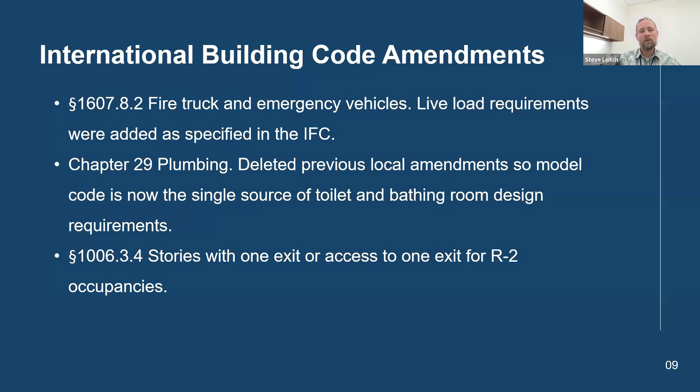All right, the residential code. Similar intent and purposes as the building code. The residential code, however, only applies to single family, 2-family, and townhouses, although we do have a policy memo that allows certain triplex structures to also be reviewed under the IRC.

We've added a definition of surcharge to be consistent with the IPMC, really just to help us understand when retaining walls require permits. The definition of a surcharge talks about there needing to be additional load placed on the retaining wall in addition to simply the earth that it's retaining.

In chapter 3, section 318, we've amended the requirements for egress doors such that in residential construction we will allow either side hinged or pivoted or balanced doors now. The way the code was written, it only allowed side hinge doors, so we've expanded that allowance.

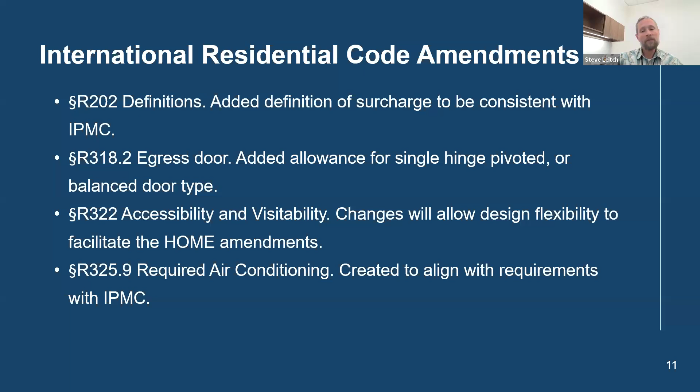All right, the plumbing code. Unlike the residential and building codes, which are written by the International Code Council, the plumbing code and the mechanical code that we use here in the city are the uniform codes written by IAPMO, the International Association of Plumbing and Mechanical Officials.

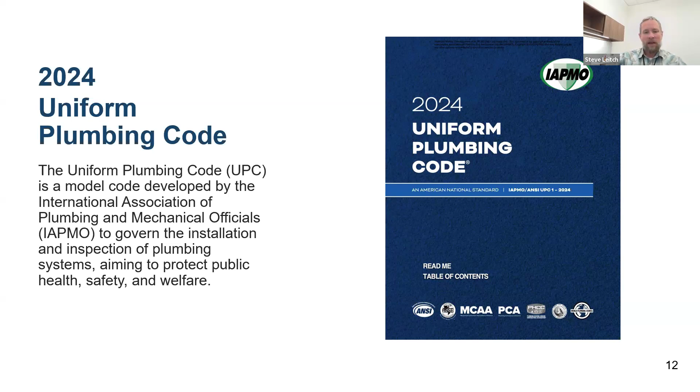We've added a definition of laundry to landscape system, and those irrigation systems are talked about in 614, and then 1503.10.1 and .2 talk more specifically about laundry to landscape irrigation systems and the requirements for those.

In 321, we've dropped the plumbing code requirements for elevator sump pumps because in the state of Texas those requirements are dictated by state law. So that section now just refers to the state administrative code that governs elevator sumps.

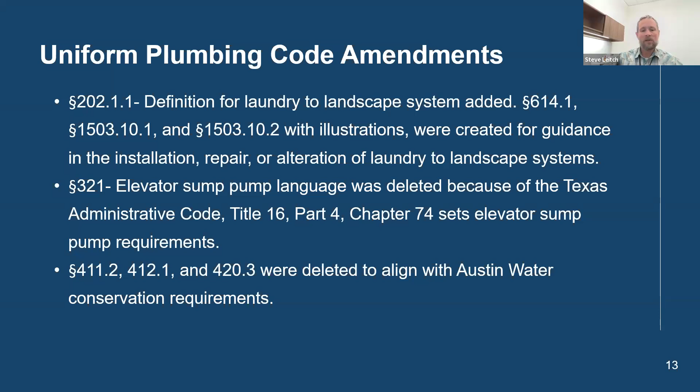Then 411, 412, and 420 were specific requirements for different types of plumbing fixtures—I believe one was water closets, I forget what the other two were for—but those stipulated things like gallons per flush. We've dropped those amendments so that we align with Austin Water's conservation requirements for those elements.

In 1007.3, we've decided to go ahead and allow barrier type trap seals. That was something that historically had not been allowed in the city of Austin, so now there's an allowance for them and an indication of the standard they need to comply with.

Then this R101, a change in the residential code—how can I explain this change? The effect of it is it allows a little bit of leniency when it comes to the plumbing in tiny homes. It allows the plumbing in tiny homes, up to the building drain, so all of the internal plumbing, to be in compliance with the International Plumbing Code rather than the Uniform Code.

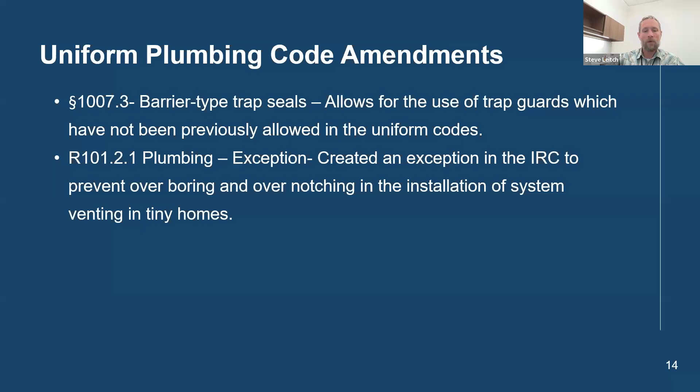The mechanical code, as I mentioned before, is again a uniform code written by IAPMO as opposed to an international code written by the International Code Council.

So again, here we had some definitions for alternate water source treatment systems, air conditioner condensate recovery. Austin Water has fairly recently launched its on-site water recovery system process, and in order to align with those requirements, we've dropped these definitions that we had historically had in the mechanical code.

Here again in 318, we've added the requirement for air conditioning to align with the property maintenance code. In 405, we've established, I hope, a little bit easier to understand requirements for residential kitchen exhaust rates based on whether the exhaust device is intermittently controlled or continuous.

And then in 523, we've added sections that refer to international mechanical code requirements for hazardous exhausts, because the building code is an international code. The fire code that we use is the International Fire Code, and when both of those codes talk about hazardous exhausts, they refer to the International Mechanical Code. So really just for correlation's sake, we've inserted those sections of the international code into our mechanical code.

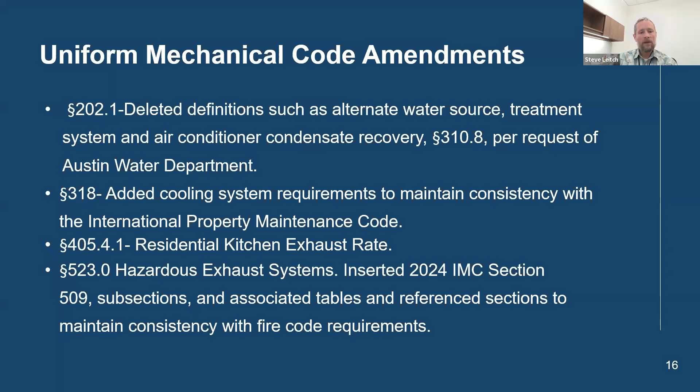Same thing here, 524, manicure and pedicure stations require exhaust, and the mechanical code provisions from the international code are a little bit more detailed and clear. So we've inserted those sections from the international code into the uniform code.

And then smoke detection controls - again, this is a case where we've inserted some sections from the international code into the City of Austin's mechanical code.

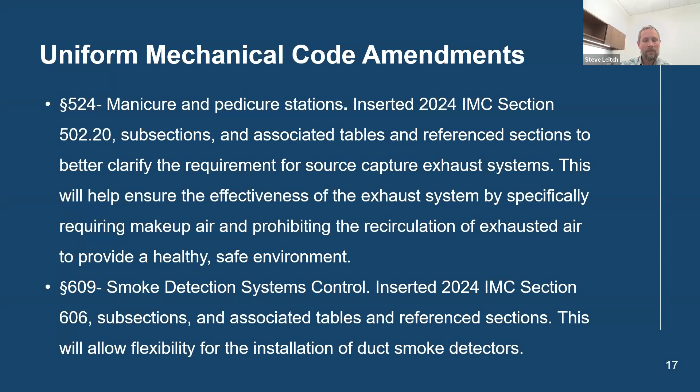The swimming pool and spa code is an international code. A lot of the changes in the international swimming pool and spa code are found in chapter 1, which is the administrative portion of the code, as opposed to the technical provisions.

As many of you may know, swimming pools in Texas are regulated by state statutes. There's a couple of different ones, and so we've inserted some provisions into chapter 1 that just reference the state regulations that swimming pools may need to comply with.

In 103, there's a bit of an administrative line in the swimming pool code such that the Development Services Department administers the code as it relates to residential swimming pools. The Austin Public Health Department administers the swimming pool code as it relates to commercial swimming pools. This section just establishes that distinction.

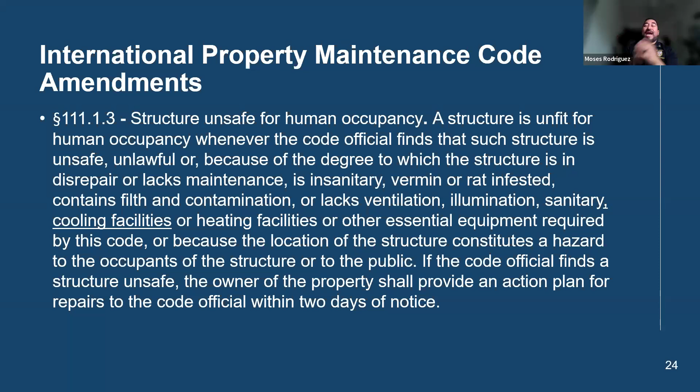It basically gives us an opportunity - when we created this, we'd go to a lot of properties and ask them, hey, the hot water's not fixed or the heater's not fixed, and we'd ask them to give us some kind of timeline of what's going to happen. So with this action plan in place, we're able to cite properties, and now we've included cooling facilities too. But we had it in place in 2021.

Definition: we expanded on the presence within or contiguous to a structure or premises of insects, rodents - we added scorpions and other pests. And also we added the definition of surcharge: the vertical load imposed on retained soil that may impose a lateral force in addition to lateral earth pressure of retained soil.

Infestation - this we knew we had added scorpion and bed bug. So we didn't have this spelled out before; we just had 'shall be kept free from insect.' Well, now we've spelled out scorpion, bed bugs, and rodent infestations. Structures in which insects or rodents are found shall be promptly exterminated by approved processes that will not be injurious to human health. After pest elimination, proper precautions shall be taken to prevent reinfestation.

This is the part that Steve mentioned that they were aligned with us, because in August 2023 there was a resolution through council to implement a code. This is something we modeled from Dallas: it requires property owners to provide and maintain air conditioning equipment capable of keeping habitable rooms at least 15 degrees cooler than the outside temperature, but not exceeding 85 degrees.

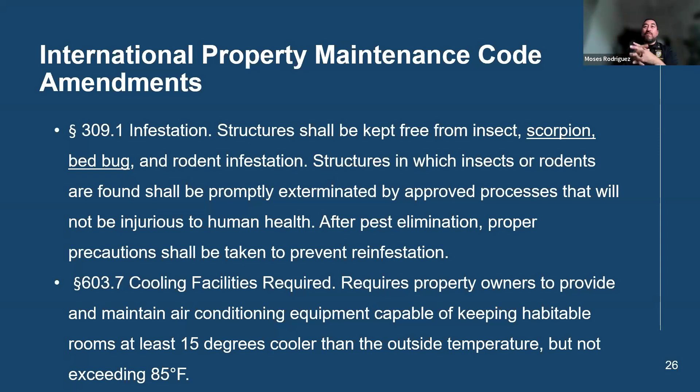We made this clarification in section 604.2 in the electrical code. The size and usage of appliances shall serve as the basis to determine the need for additional facilities. It shall be served by 3-wire, 120 to 240 volt, single phase electrical service with a minimum of 100 amps.

Only if the electrical system is defective or damaged. So we had a house today that was built in 1965, and there were some electrical issues - a car actually caught on fire and burned their power line. Because their line is damaged, they do have to bring it up to 100 amps today. But if the system's still working - it's a 65-year-old home, still working, with no defects or damage - it can continue and won't be in violation. This only applies if it's defective or damaged. Next slide.

I think turn it over to Austin Energy. But yes, we have Patricia. Yes, good morning everybody. My name is Pat Chawla. I'm with Austin Energy Green Building, and I'm a residential manager for the residential green building team, and I'm going to talk to you about the energy code this morning.

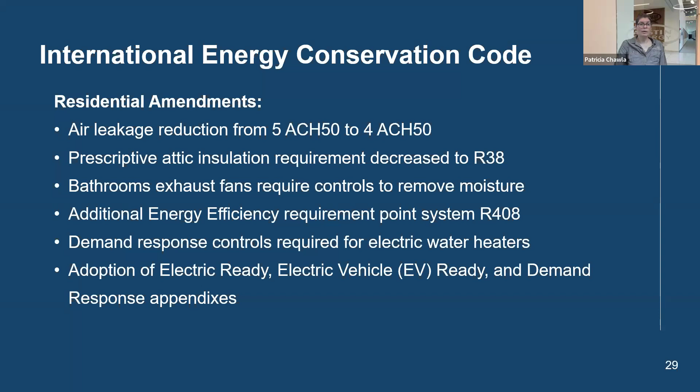Electric ready means that there are some extra electric outlets near certain fossil fuel appliances, to make sure there is a choice for homeowners when that appliance reaches the end of its life cycle. Electric vehicle ready means we're incorporating some extra infrastructure into the building to make sure it's ready to install a charging station later on with minimal changes to the building. Incorporating these items at original construction is way more cost effective than trying to include them later on.

Moving on to the commercial amendments: similar to residential, air leakage was also reduced, and that is isolated to the group R and I occupancies. There were updates to the HVAC efficiency tables that align with the federal changes and with ASHRAE.

Total system performance ratio allows for trade-offs within the HVAC system design, similar to how in the energy code you can trade off minimal envelope items within that category. Say not all your windows are the same U-factor—you could average those out, or if a few are a little higher and others are on the edge, maybe your wall assembly or insulation is a bit better. On average, you can do a UA calculation and you're good to go. That thought process is now applied to HVAC, especially in commercial where there's a lot more variability in the equipment—those efficiencies can be traded off within the HVAC system design.

Similar to residential, with the additional energy efficiency section in the commercial portion of the code—that's C406—they've had a point system since 2021 and they've updated it in 2024. Renewable energy systems and energy storage system readiness are now required in the commercial code. That means there is a renewable energy system requirement; however, the energy storage system is only a readiness requirement, meaning infrastructure is required, not the actual item. So renewable energy systems is a new requirement coming from the model code.

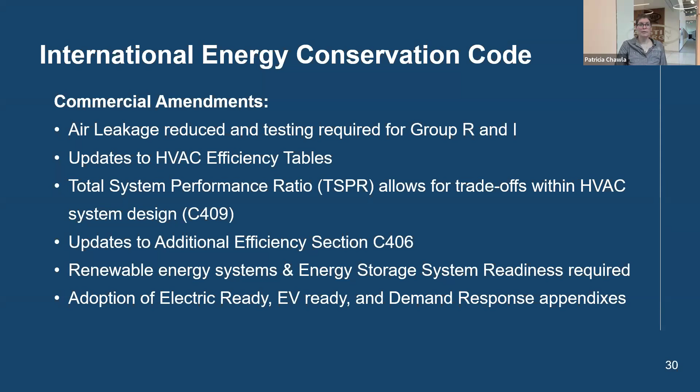Lastly, just like residential, electric ready, EV ready, and demand response appendices were adopted, with a few amendments to make sure there's alignment with our local goals here at Austin. Next up will be Yvonne over at Austin Fire.

Hello everyone, my name is Yvonne Espinoza, and I'm one of the engineering supervisors for engineering and plan review with the Austin Fire Department. I'm going to highlight some of the major changes and additions that are going to happen in the 2024 IFC. The IFC establishes minimum regulations for fire prevention and protection, aiming to safeguard life, property, and public welfare from fire and explosion hazards.

We're going to begin with the animal care facilities. Local amendments are being added concerning these facilities and the requirements for automatic sprinkler protection and fire alarm protection, including fire alarm protection in existing facilities.

In Chapter 2, a definition was added for animal housing and care facility, which defines it in summary as a facility for 24-hour care or permanent housing to provide service for participation in sport or general boarding care. These types of facilities are listed in the definition, and there are some exemptions listed in the definition as well.

Section 903.2.2.3 requires automatic sprinkler protection when animals are not provided with constant supervision. There are some exceptions for facilities serving less than 25 animals with Class A wall and ceiling finishes and a supervised fire alarm system, and for facilities serving less than 50 animals with 1-hour fire resistant construction on boundary walls, a Class A wall and ceiling finish, and a supervised fire alarm system.

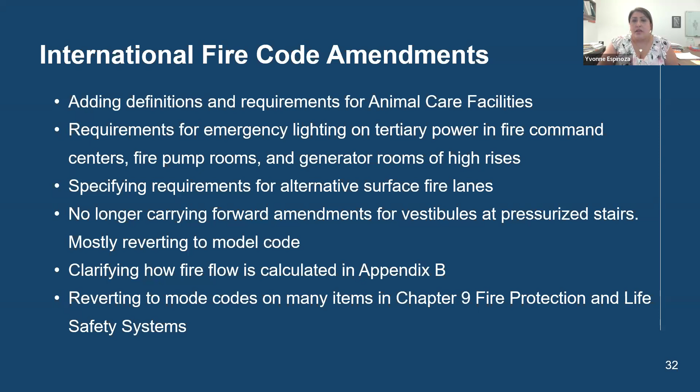Moving on to some of the changes that are affecting lithium-ion and lithium metal batteries and hazmat. A new section was added in the 2024, section 320, that covers the storage of lithium-ion and lithium metal batteries.

This does not apply to batteries packed in or with the devices, equipment, or vehicles that it is designated to power. It also does not cover lithium-ion batteries rated for not more than 300 watt hours. Temporary storage during manufacturing or vehicle repair also does not need to meet this section.

If you are required to meet section 320, you will have to obtain an above ground hazardous materials permit for any storage over 15 cubic feet. This is true for existing facilities too, that would fall under 320, even though they would not need to comply with 320. There are now restrictions for the capacity of containers for storage of lithium-ion batteries, distances to exits, and distances between groups of containers.

Indoor storage areas now require a technical opinion and report on the fire and explosion hazards, 2-hour separation with some exceptions, automatic sprinkler protection, fire alarm systems using air aspirating smoke detection or radiant energy sensing fire detection or both, and explosion control if it's deemed necessary by the technical opinion and report.

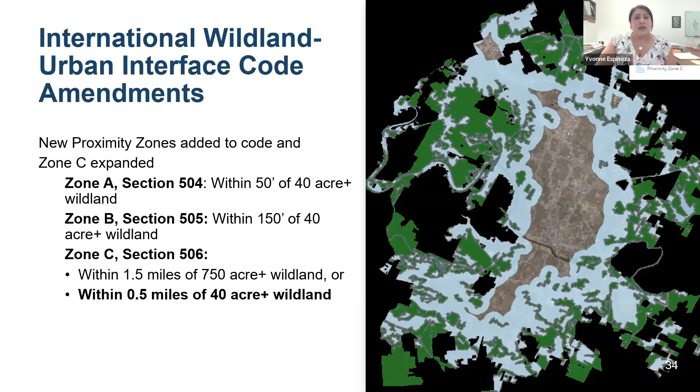So new additions to the code include limited access residential infill projects; wall flashing or non-combustible exterior wall finish is required by the model code for Zone A exterior walls. Zone B exterior walls is now based on the model code in section 505, which also matches Zone A. And the Ember Ignition Zone, or EIZ, requires non-combustible materials and no vegetation within 5 feet of the building as measured from the eave. Zone C now has eave protection, which is similar in all zones to protect against ember intrusion into attic spaces. Next slide, please.

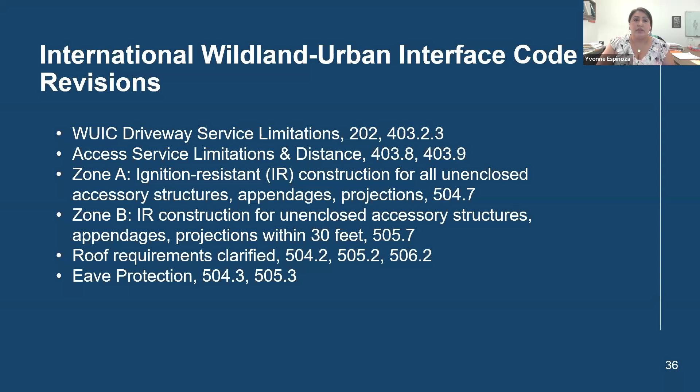This slide shows some of the revisions made to the 2024 WUI code, including aligning the WUI driveway service limitations with the home initiatives. For site access, 2 points are required for site plans with 30 or more dwellings to match the subdivision regulations in the land development code. Zone A unenclosed accessory structures, appendages, and projections must all be built with ignition-resistant material. In Zone B, these structures need protection only when located within 30 feet of a building with habitable space. Zone C still has requirements for these structures within 10 feet. Roof and eave requirements have now been clarified with local amendments, including previously enforced interpretations and a new stricter standard for exposed rafter tails. Next slide, please.

Some requirements have been reduced compared to the 2015 WUI code. There are new exceptions for Zone C, and certain previous allowances have been formalized. For example, driveways only need to support a brush truck, not larger fire vehicles, and this would be clarified in the criteria manual. Roof replacement is now required only if 50% or more of the roof is replaced, up from the previous 25%. Boat docks in the WUI only need protected roofs and walking surfaces. In zones B and C, a shorter 10-minute fire test is now accepted for some materials instead of the previous 30-minute test.

Zone C has several new and continued exceptions. Closely mowed, irrigated green grass is allowed in the newly required Ember Ignition Zone. Slope shingle roofs may qualify for reduced underlay requirements. Underfloor protection is still necessary, but no longer needs to be ignition resistant. Any exterior wall material allowed in Zone C is acceptable.

Driveways are only required if a residential building is 200 feet or more from fire access road instead of 150 feet. Decks over steep slopes can now be constructed like those over flat surfaces, no longer requiring 2 layers of ignition-resistant construction as needed in zones A and B. For residential structures, only the first 5 feet of fencing needs protection, formalizing a current allowance. And finally, soffit vents are permitted in zone C if they have ember protection mesh or approved vent, also formalizing one of our current allowances.

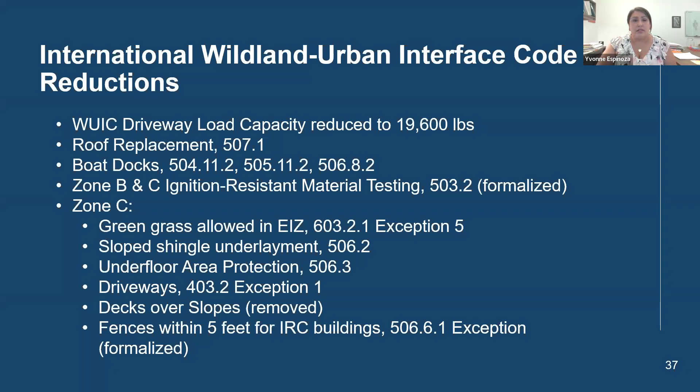Next slide, please. Okay, so this QR code is going to take you to the full presentation for the WUI. And you can also reference our webpage for any additional resources. It's on the Austin Fire Department's Wildland Urban Interface Code webpage. Thank you.